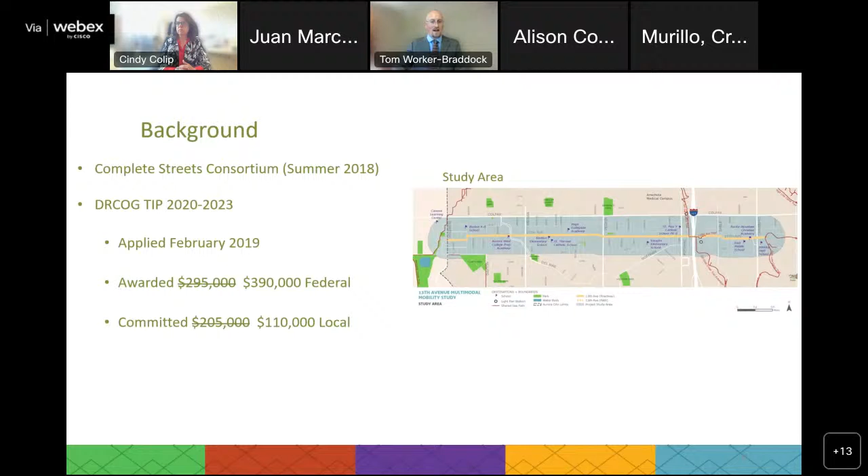And I am not... okay, there we go. We lost the presentation. What's that? We appear to have lost the presentation. No sharing. How's that? There we go. Apparently each time I advance a slide, I have a 50-50 chance of turning off the presentation.

Narrow sidewalks predominate on 13th Avenue. If there's more than one person walking, that means others in the group have to either walk in the parking lane or even around parked cars.

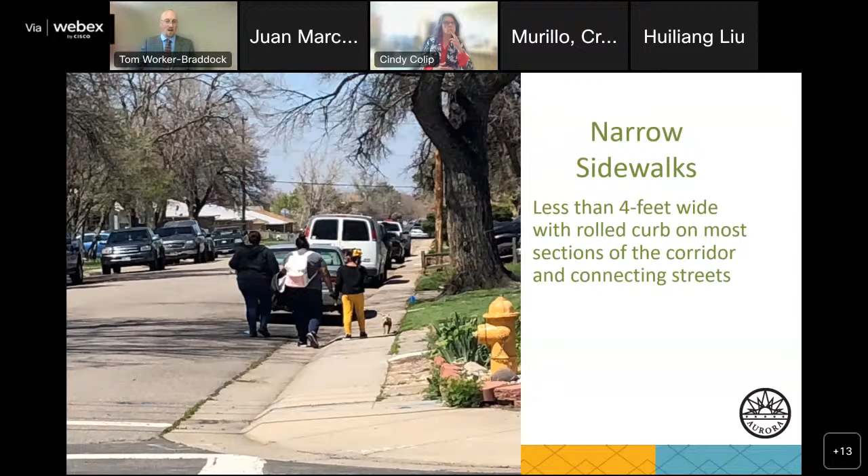The top map here shows the speed limits along 13th Avenue, but also the 85th percentile speed, which is the speed 85% of drivers travel along or below. This is generally seen as a measure of how people actually travel. For 13th Avenue, this tells us that people are driving at nearly 5 to 10 miles per hour over the speed limit, depending on the segment, and indicates that for those people, it's comfortable and feels normal to drive faster than the posted speed limit along 13th Avenue.

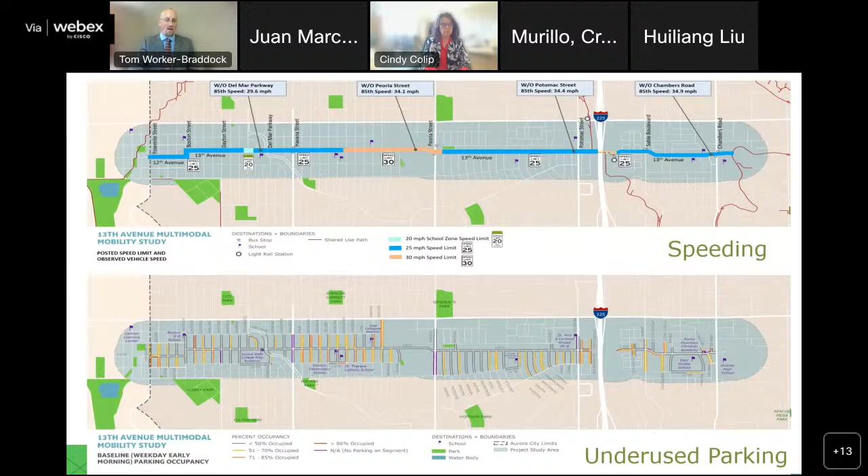The flip side of this is that those speeding cars make anyone walking or using a bike on the corridor feel less comfortable. The bottom map shows the amount of parking being used on the corridor. We not only looked along 13th Avenue itself, but also one block north and south. We examined parking use at 3 periods: weekday midday between 11 and 1, weekday early morning between 4 a.m. and 6 a.m., and weekend late evening. In all time periods, less than half of parking was actually used along 13th Avenue. When talking about this with the public, several mentioned that folks have had cars hit on 13th Avenue and they were afraid to park there because of the travel speed of vehicles.

Now I want to focus on what we've heard from the public throughout this process. We had 3 rounds of reaching out to the public, and they were a mix of virtual meetings, interactive maps where people can make comments, and in-person events.

In the first round, most respondents said speeding vehicles, narrow sidewalks, and no safe space to ride a bike were why they felt unsafe traveling on 13th. When asked what would improve traveling, people responded with better crosswalks, wider sidewalks, separation between the road and sidewalks, and bike lanes separated from traffic.

Conversely, most respondents said their preferred vision for 13th Avenue in the next 5 to 10 years was where cars still travel the corridor, but feels like bicycling, walking, and transit are on equal footing with car travel.

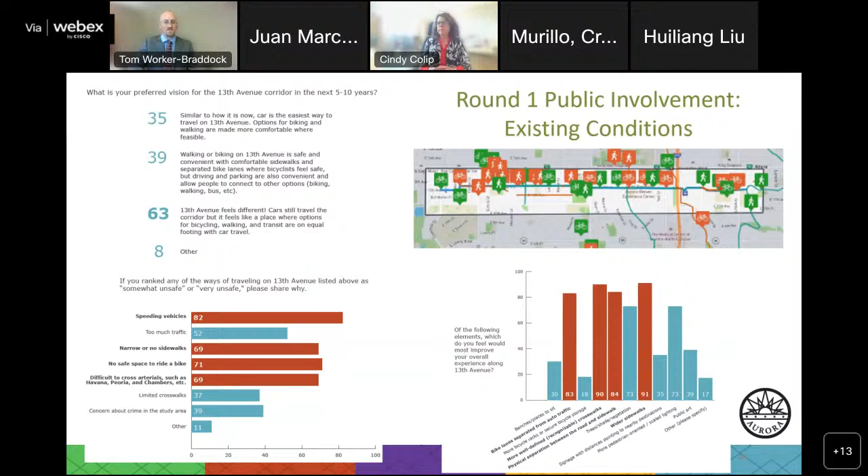As part of the second round of public engagement, we held a family-friendly streets event in October of last year. This is also known as Tactical Urbanism. It's where we went out to a 2-block section of 13th Avenue right next to Kenton Elementary and St. Therese Catholic School, created wider sidewalks, bike lanes, separated bike lanes, and a shared use path using temporary materials, and invited the public to tell us what they thought about each segment.

We held this on a Tuesday afternoon and had everything in place by the time parents started arriving to pick up their kids from school. We incentivized their participation. If people filled out a survey, they would get a pumpkin, this being Halloween season. And if they filled out a survey at each of the different survey stations, they would get a ticket for an entree from the food truck.

Unsurprisingly, people liked wider sidewalks, preferred separated bike lanes over regular bike lanes, and liked the shared use path.

To make sure people knew about the event, we hand-delivered flyers to all of the households, not only on 13th Avenue itself, but on all of the cross streets, 1 block north and south. We worked with Aurora Police to place 2 variable message signs for 2 weeks along the corridor, and then gave a golden ticket, good for a food truck meal, to the property owners surrounding the event. A physical banner was placed along the corridor, and the event was announced in the Aurora Water newsletter.

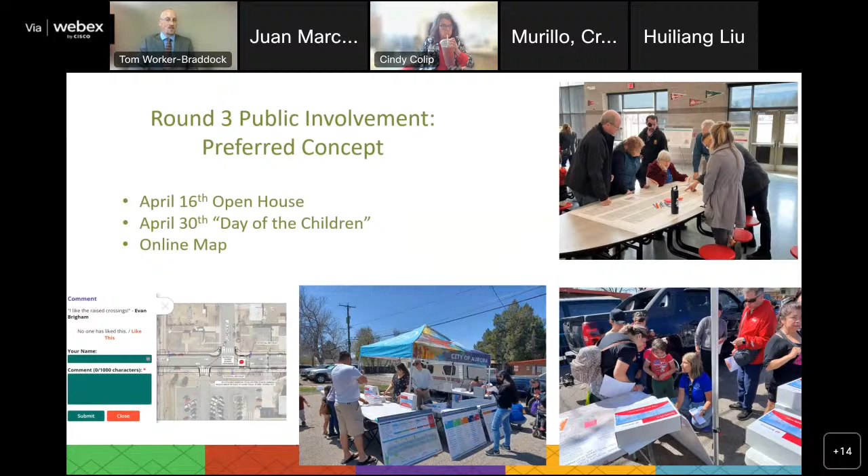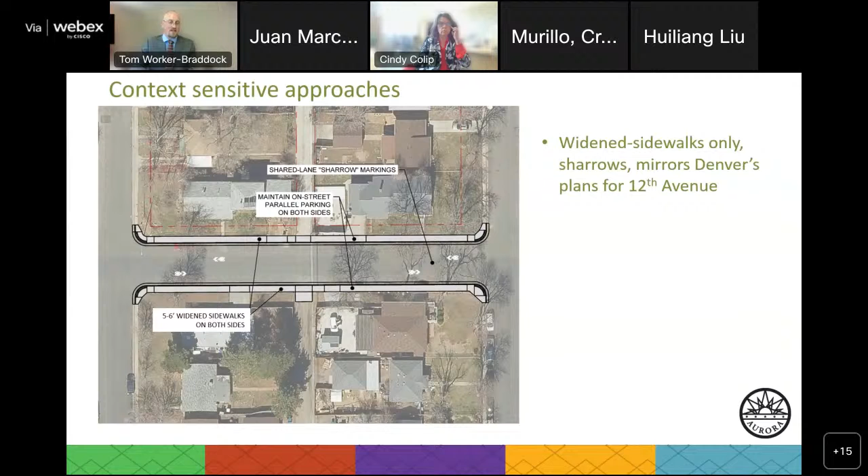This preferred alternative isn't a one-size-fits-all, and we've identified where it would need to vary to take into account available right-of-way, adjacent land uses, and needs in a context-sensitive manner. The segment between Yosemite and Boston would have 6-foot sidewalks on either side and shared lane arrow markings. This matches what would be going in on the other side of 12th Avenue with the Denver Bicycle Network.

As we move further east towards Havana, the corridor features steep grades and mature trees, so the landscape buffer next to the shared use path will be reduced.

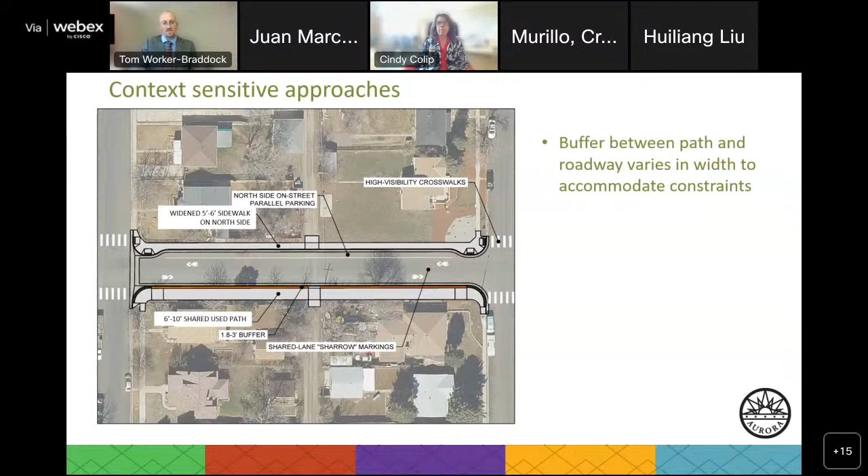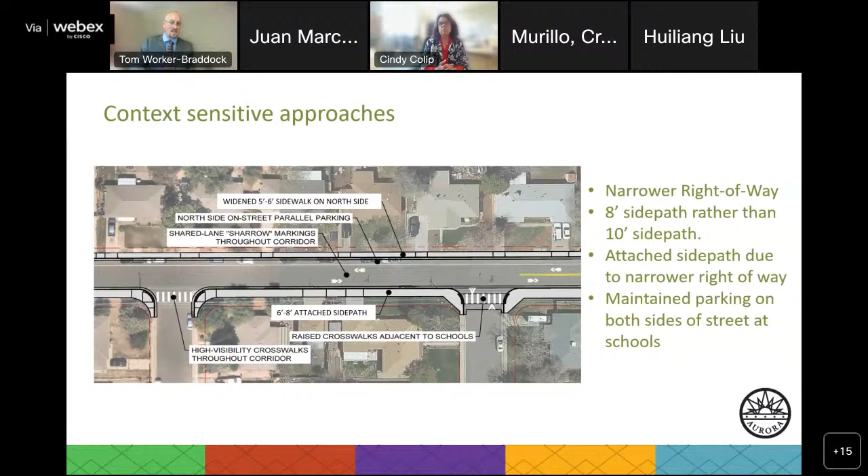East of Peoria would have a slightly narrower 8-foot side path that's directly next to the street. Parking would be maintained on both sides of the street at schools.

East of Sable, the corridor has more right-of-way available, so we'd be able to do a 12-foot wide shared use path with a landscape buffer while still maintaining parking on both sides of the street.

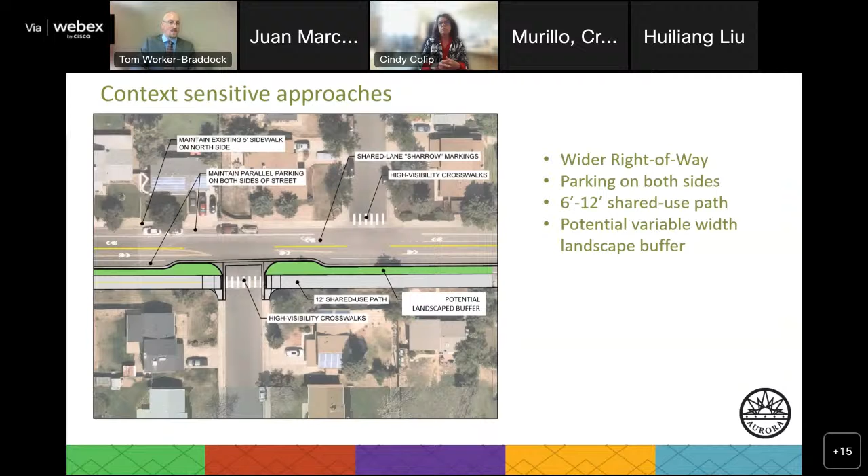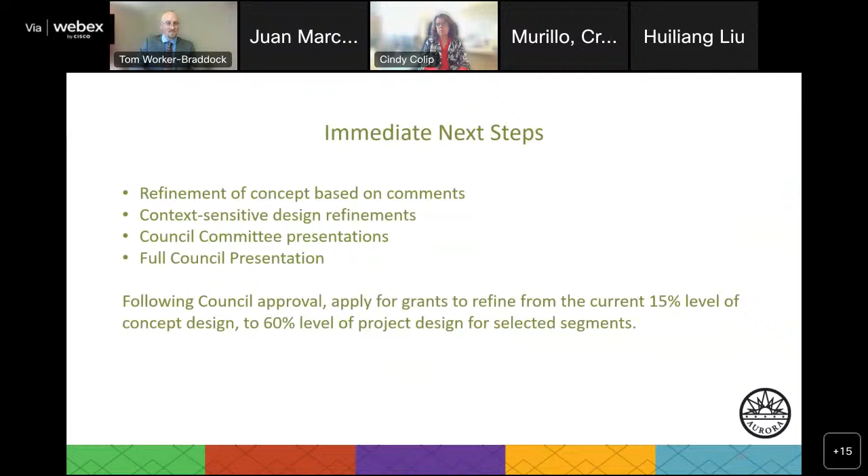So we're currently reviewing the comments received in the third round of public involvement and refining the concept as appropriate, including in a context-sensitive approach. Then we'll present the full report and concept back to this committee and then to the full council. This will allow us to apply for grants that can bring these designs from the current 15% design up to a 60% design level for specific segments. And with that, I'll take any questions you may have from the committee.

Thank you so much for that update, Tom. And I want to share Councilor Murillo's enthusiasm in the chat that it sounds like the canvassing strategies used were really effective to get community feedback. So I just want to applaud y'all for that. And in general, I'm very excited about this project.

So my only real concern here is the lane use proposal. If I can go back to that slide on my end here. Sorry, I'm having some eScribe issues. All right. What I've heard from folks who use bikes or want to utilize bicycles more as their mode of transportation is that sharrows, while appreciated, still generally feel very unsafe. And I can understand why motorists would prefer the sharrows because it more or less keeps the drive lanes intact. But I'm wondering, is there another configuration where we might have at least a second side path, similar to what we see on the left-hand side there, that's more reserved for bicycle use? Because I feel like that's the only way we could allow travel in the other direction without folks still feeling unsafe as they do with sharrows.

This is a direct response to several things we heard in the public involvement round, the top priority being safe routes to school. So what would an 8-year-old feel comfortable doing? That's where the 10-foot ideally side path would come in. That's what's required for bi-directional bike travel, and would be appropriate for that elementary or middle school target user. However, there are different types of bicyclists, as we're all aware. So while young kids and families on a bike ride may feel better using a side path, more confident and enthused cyclists would still continue to travel in the travel lane and share it with cars.

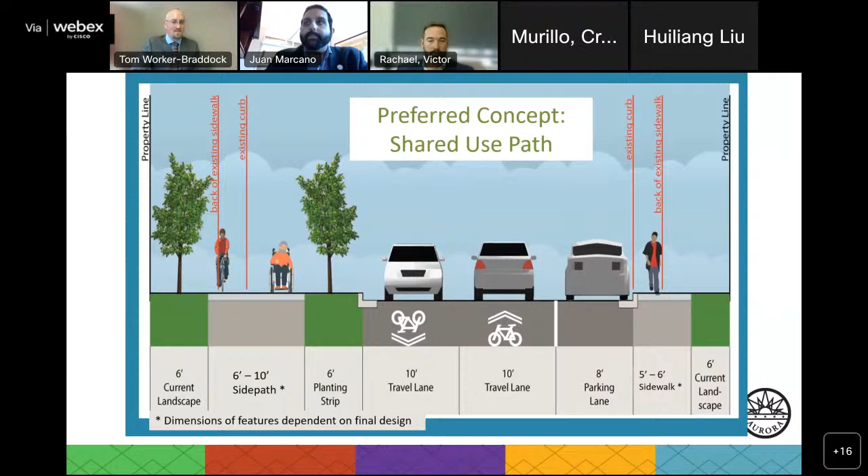Happy to hear that, thank you. Councilmember Coombs?

I noticed there was also discussion of selected segments in the next steps for the 60% design. So is this project going to be built out in phases? How does that work, and what's the determination of which segments are built out first?

This is a 5 mile corridor, and it would be very challenging to build it out all at once. So the thought was to bring select segments up to 60% design—those segments are still to be identified, but they would probably be near and adjacent to schools, to fully leverage safe routes to school opportunities for students, and there may also be funding opportunities to improve those segments. Instead of bringing the entire corridor up to 60% design, where we may not be in a position to improve it right away, by the time we get to later segments the design standards may have changed anyway, requiring updates. So the thought was to identify preliminary segments we're prepared to improve, design those, and then pursue funding for them.

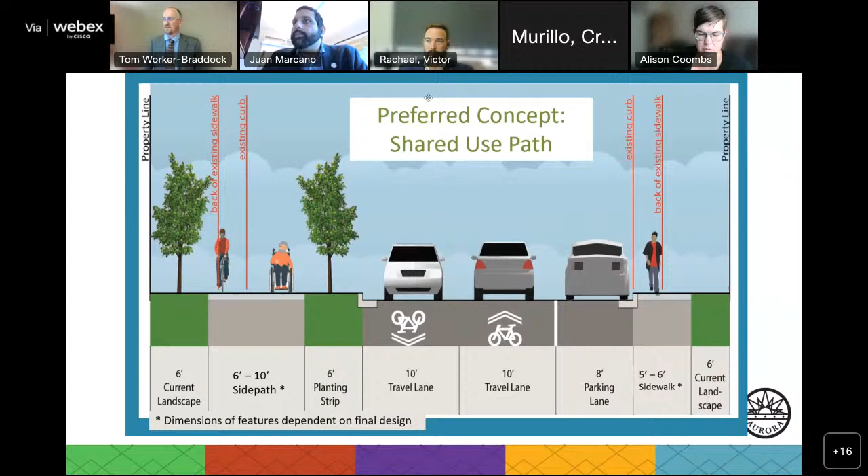Sure. Just give me one moment to share my screen. Okay.

Good afternoon, committee members and Chair Marcano. My name is Matt Kozakowski, Transportation Project Delivery Manager. I'm here to present the IGA between the City of Aurora and the city... oh, I'm sorry, I have the wrong one, that's the next one, I'm in the wrong order. Yes, sorry, this is the IGA between the City and County of Denver and the City of Aurora for the Peoria Crossing project.

A little bit of project history, since this goes back quite a ways. The project was sponsored by DRCOG, Denver, Aurora, as well as RTD, and the project cost was approximately $60 million, with the lion's share coming from a DRCOG TIP grant as well as RTD FasTracks grant. The goal and scope was relatively simple: to provide a grade separation over Peoria, over the Union Pacific facility, including the new RTD A-Line facility that was being constructed parallel to Union Pacific. The Peoria corridor itself is a key connection for the Anschutz campus to I-70.

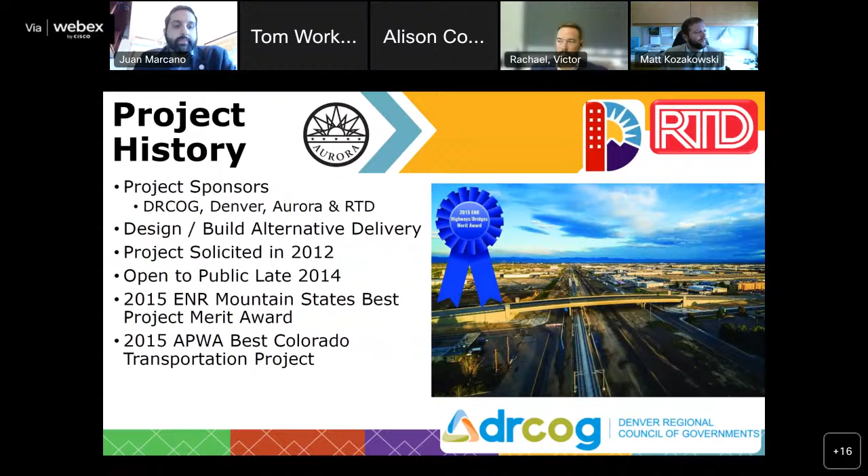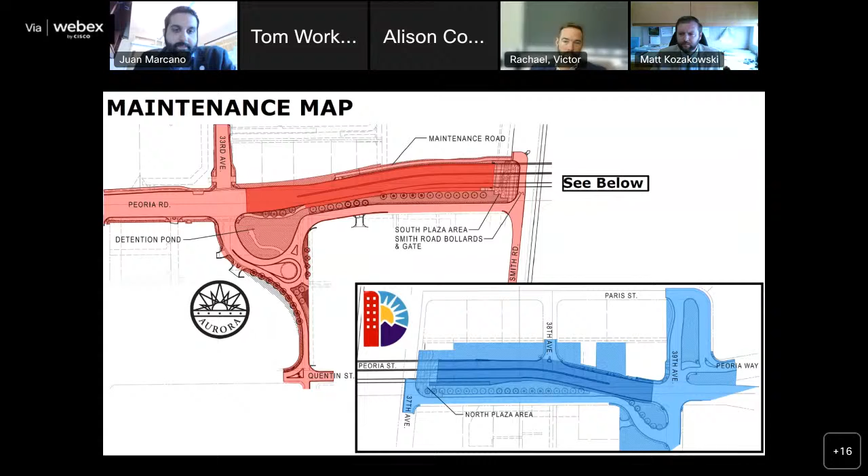General overview of the IGA responsibilities: the document identifies the ownership, operation, maintenance, and reimbursement responsibilities, and establishes clear guidance on the definitions of repair, rehabilitation, and replacement. A lot of lessons learned there from staff. This is important because those terms can mean different things to different people, and we wanted to get into the specifics of what is a repair, what is rehabilitation, specific to the different elements of the structure.

So that we have a clear path forward with our maintenance partner in Denver moving forward. Beyond the structure, each municipality is responsible for their own approach. Routine maintenance is split: Denver performs routine maintenance on the structure itself, including the road surface, and Aurora performs snow removal and street sweeping of the structure. So there's a partnership there in the routine maintenance as well.

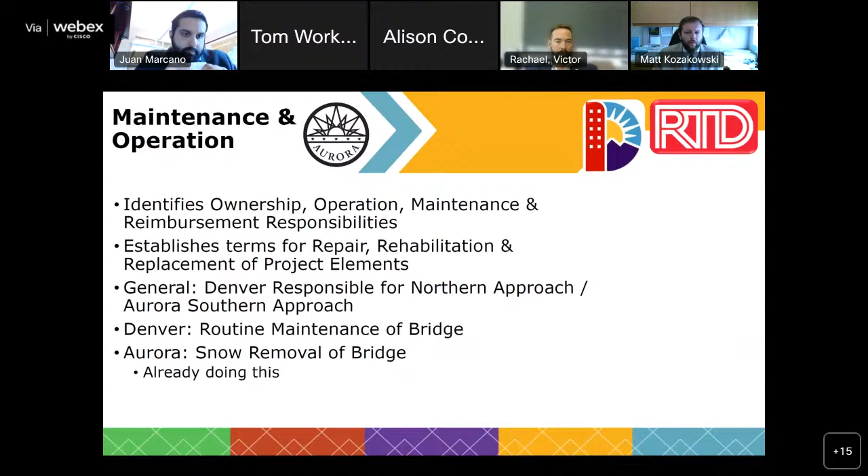And with that, that concludes my brief presentation. I'm available for any questions you might have.

All right, thank you, Matt. I do not have any questions. Councilor Coombs or Murillo? I do not have any questions. Nothing from me, thank you. All right, great, does the committee want to move this forward? Yes, all right. I'm good with it as well. Councilor Murillo? Yes, alright great, so that's unanimous.

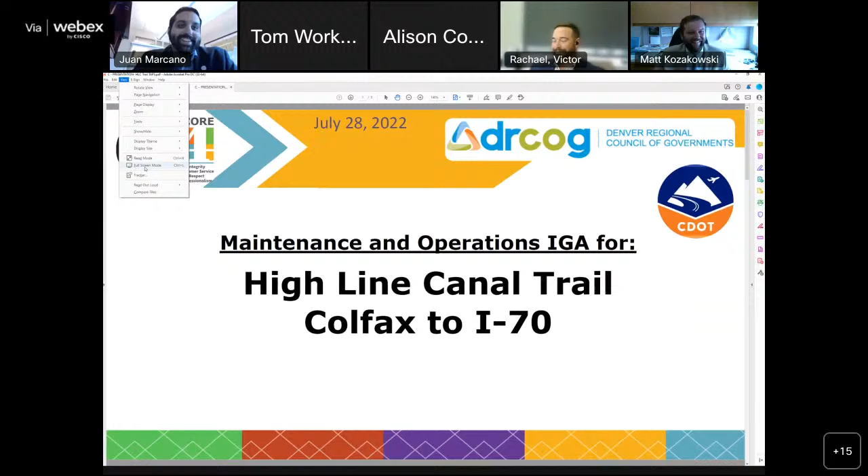So hopefully this project is a little fresher in the committee's head. Probably, as a reminder, this is a DRCOG TIP grant in the 2020 to 2023 cycle, for improvements of the High Line Canal from Colfax to I-70.

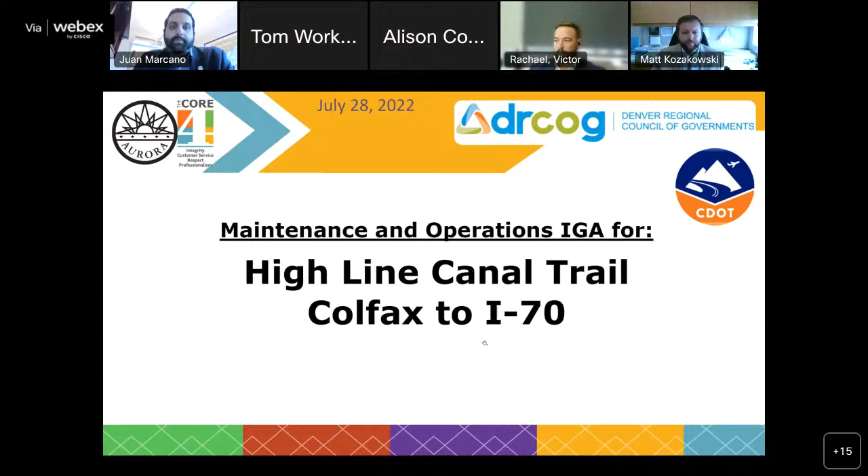We brought forward the funding IGA to initiate the project about a year ago, and today's agenda item is the maintenance IGA with CDOT for the project improvements. Since then, we've completed the project design. The project is currently out to bid, and we are getting bids back on August 12th, so please send your positive vibes in our direction on that front. We anticipate award and notice to proceed in November, and the project has about a 12-month performance period.

The contractor will get the majority of the flat work done, the trail itself along the canal alignment, and that'll give them time to order the bridge structure itself, because we anticipate that'll have a little bit of a lead time, but those also go up fairly quickly once they do come in.

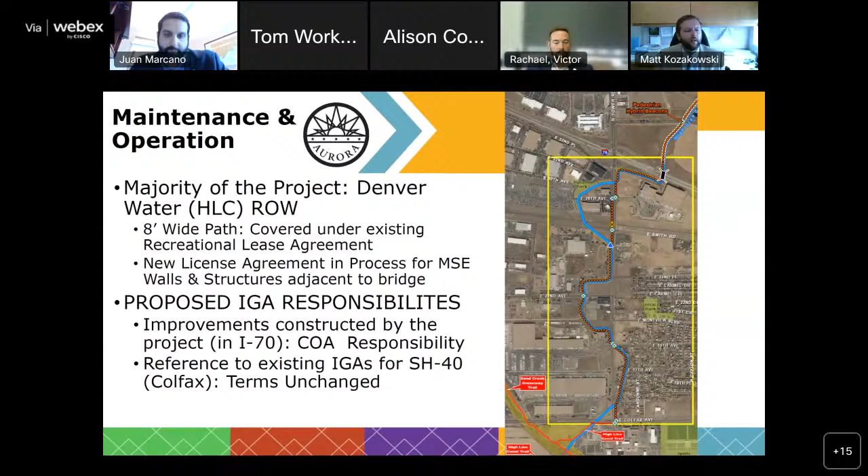The terms of the IGA are fairly straightforward. The existing facilities of I-70 will remain CDOT's, including all paving, lighting, roadside ditches, ponds, vegetation, and routine maintenance such as snow, ice, and debris removal. The new structures being constructed with the project, namely the bridge, the pier landing in the middle of I-70, and the associated walls ramping up to the bridge, will be the responsibility of the City of Aurora moving forward, including any fencing and drainage, and short-term and routine maintenance, including snow, ice, graffiti, and debris removal.

So again, some quick ones today. That concludes my brief presentation, and I'm available for questions.

Thank you again for the presentation. I don't have any questions on the maintenance side. I do see something that's now giving me anxiety on the design side, but that's another conversation. So I'll hand it off to the other committee members. Do you have any questions or comments?

I assume it's the part where you actually still have to cross the street instead of going over, or having some way to not have to cross the street that's giving you the anxiety. On Smith, yeah. I think in previous discussions, it seemed like there really wasn't another way to manage that, if I recall correctly.